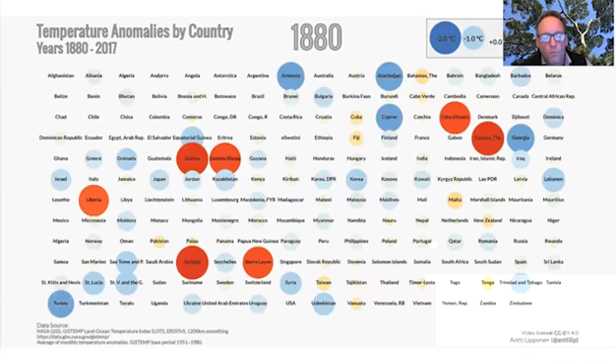So to start with, again, reminders of what are these signs of climate change that are all around us, some of which are subtle and some of which are more obvious. And I think the more important thing is what are the tangible impacts, some of which we have seen but some of which we have yet to see, on the way we live our lives, our health, and our overall well-being. So I just wanted to show you this diagram, which I find kind of interesting and compelling at the same time.

The first time you won't get it, but you see it goes from bluer to redder, showing from 1880 to 2017 the trend towards a warming of temperatures across the globe. I think that's one that people have commonly heard of.

In addition, along with this temperature, it's all interrelated, such that what is expected to happen with the effects of climate change, because of warming temperatures and the change in the way the atmosphere is able to absorb water, there'll be an increase in precipitation intensity. A larger portion of the rainfall will occur in shorter periods of time. We've seen that in other areas where we may have longer periods of drought, but then when we have rainfall, it's much more intense than we're historically used to.

You'll note here on this chart, where it's blue is areas where the climate models predict an increase in intensity by the end of the 21st century. We happen to be in one of those pretty darker blue areas, and the brown tends to be where there's going to be increased drought.

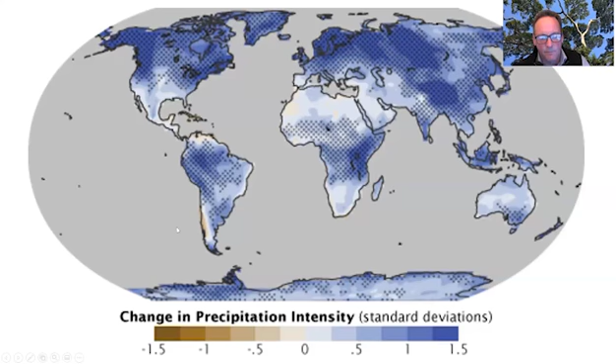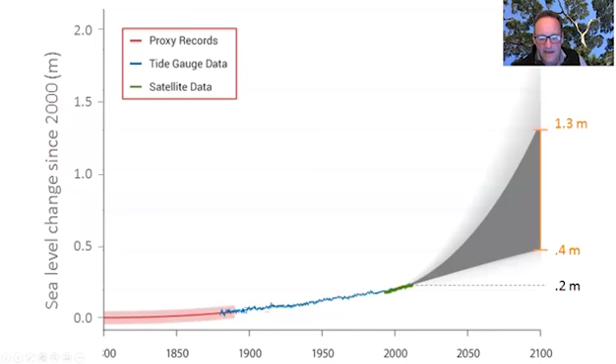One that is more common, given that we live closer to the coast, is the concept of sea level rise. You see there's a variety of data proving this out, from historic records and tide gauges more in current times from the 1900s up to the present, and now satellite data is also proving that out.

In the Boston area, the general projections, although they're often in flux, everybody's kind of agreed at this point that by 2030, which is now not even 10 years away, we'll have 9 inches of sea level rise. Another 40 years down the road in 2070, we'll have another 18 inches, for 27 inches of sea level rise. And by the end of the century, there's anticipated being 40 plus inches of sea level rise change. So how do we start to think about that, and how do we deal with that?

Another topic that doesn't get discussed as much is CO2 emissions and discharge. It's interesting to see that we are amongst the nations of China, Russia, Germany, and Japan that are highest in output of CO2 emissions, again changing the atmosphere around us. And those that are highest impacted are those that are not producing it, but are those countries such as Central Africa, Asia, and the South Pacific.

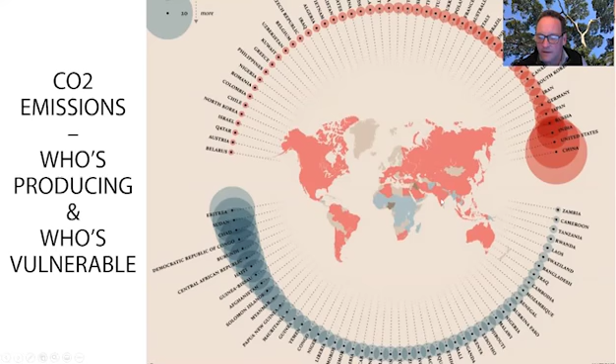How do we walk before we run and take measures in that regard? So we're going to look a little bit at some climate change mitigation trends over time, and then turning into strategies, and then related resources.

Being in Boston, I'm fortunate to be involved with an organization called Urban Land Institute. About 5 to 7 years ago, as soon as sea level rise started becoming an issue with superstorm Sandy and other storms we've seen along the East Coast, which hasn't been as severe in Boston but have in other areas, it brought attention to these issues. Urban Land Institute, composed of a lot of real estate related professionals, put together with ULI funding a study about living with water.

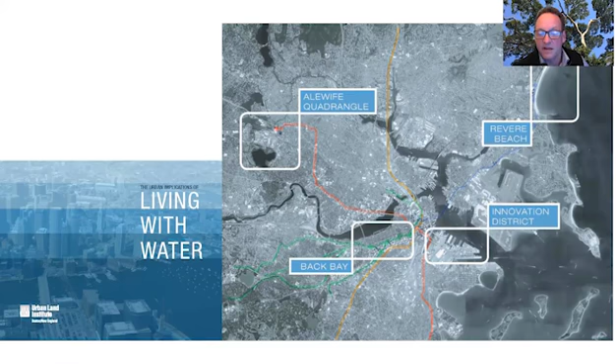It started to think about this not being a possibility, but an inevitability. While it was a bit visionary in its thinking, it got us to think about how do we live and how do we accommodate some of these inevitable climate changes. While this is a bit extreme in its notion, if we look down the road...

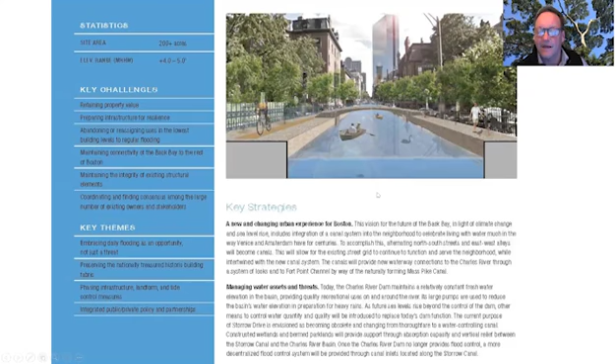...this is a picture of Back Bay, I think Berkeley Street was the idea, as we have climate change. The interesting thing about climate change is that the areas we have filled through time are the places the sea is most strident in taking back. That's partially because those areas of fill haven't been filled that much, but those are the areas most vulnerable to sea level rise. So the idea of Back Bay being a modern day Venice is something that may be on the long distance horizon.

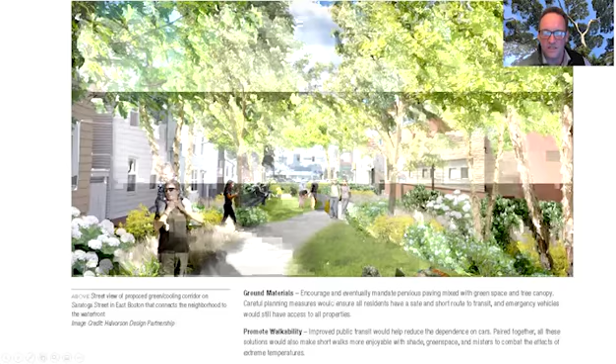So what are the visionary counter effects we have to that? That report looked at a variety of different neighborhoods around Boston, and in East Boston, looked at the idea that maybe as we move through time, we think about our transportation and maybe the need for less roads. If we think about transforming some of our roads selectively into public open space, they can be cooling environments, places of enhanced quality of life and better habitat to counteract the heat island effect. These were early on kind of inspirational studies that were done.

More recently, that has all initiated a mayor-initiated study called Climate Ready Boston that looks at the overall city of Boston, not just the water's edges, but where the city overall is impacted by climate change. The city has gone from an overall study to a series of different neighborhood studies, one by one, to look at the measures needed in those areas to both protect and use those protections as a means of enhancing those communities.

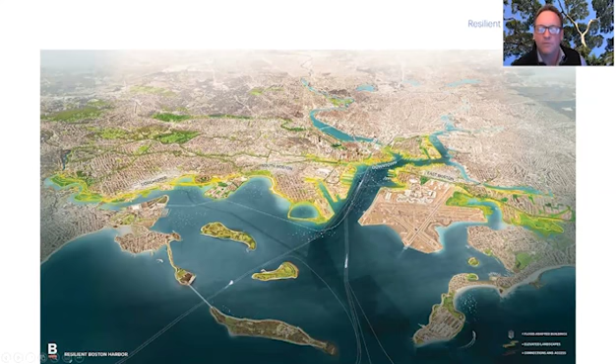We've been fortunate to work on this area in the center, the South Boston neighborhood, and I'm going to zoom into that now. As part of that study, the South Boston neighborhood is composed of a lot of varied neighborhoods and areas. The original historic neighborhood is the residential neighborhood you see more in gray and white in the middle, and that just so happens to be on the highest area of land.

The other areas of land within the dotted line are mostly the areas that we as humans have filled, which was formerly sea. Those are the areas, as I mentioned earlier, most vulnerable to sea level rise and storm surge. This map identifies, first with black lines with arrows, where the points along the shoreline are right now, today, most vulnerable to flood pathways when we have king high tides, in association with storm surges.

The darkest blue areas are where they're experiencing flooding conditions right now, in and around South Boston. As the areas get lighter, that becomes the next projection—the next lightest area is around 2030, and the even lighter area is 2070.

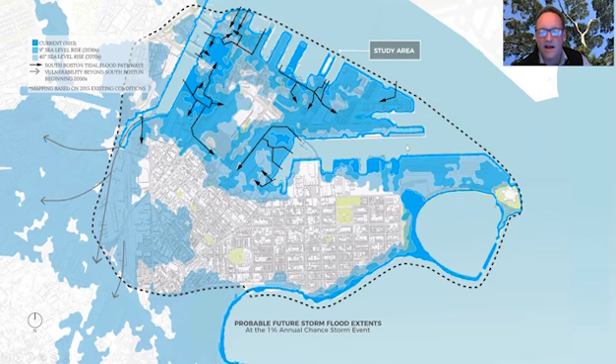One of the interesting ironies: this goes from South Boston, Castle Island, to Massport's Conley Terminal, where much of the shipping containers come in and out. This is the maritime area, and then the more recently developed Seaport—ironically, a lot of this development was permitted prior to the last recession, so it occurred before the awareness of sea level rise and climate change had come to pass. Now, retroactively, these property owners are having to think about how to protect their properties and enhance them.

This is Fort Point Channel, adjacent to South Station, and its vulnerability connects to the Massachusetts Turnpike, which is a low spot such that if Fort Point Channel overtops, it has the ability to flood all of Back Bay, as the Mass Pike is a lowered section where the water could make its way easily down towards Allston-Brighton.

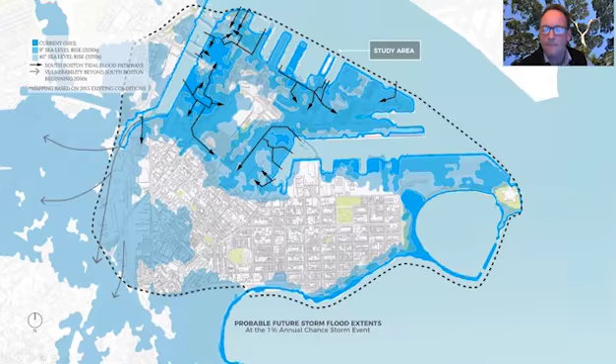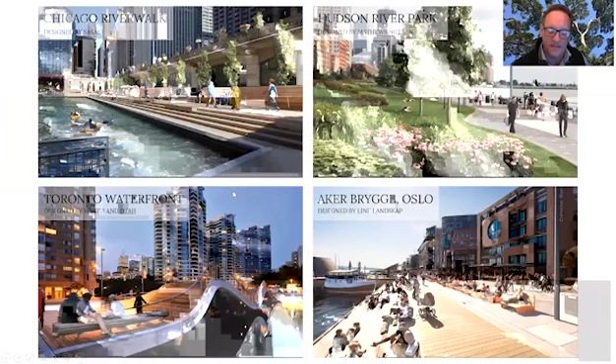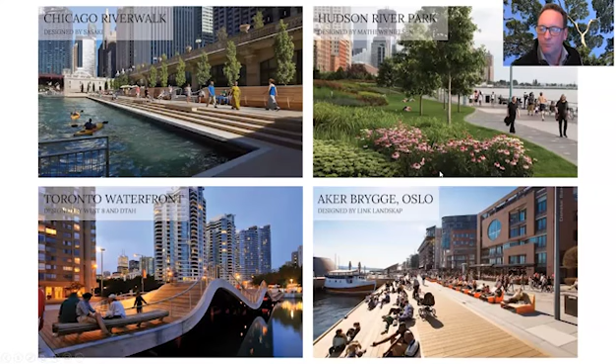These slides—whether it be Chicago Riverwalk, Hudson River Park, which is more of a green solution, Oslo, or Toronto waterfront—they all combine investments in infrastructure with improvements in quality of life and enhancements, in some cases, to the environment. As we think about these available solutions, they span a range of approaches, with sub-approaches within that, but I'll touch on this lightly tonight given the time frame.

The most straightforward approach to creating protection in infrastructure is essentially a vertical seawall that protects us, keeping the water out and the inland side in. The next strategy would be to not focus on keeping water out from the land's edge, but instead on waterproofing our buildings and structures so water cannot penetrate inboard. Those are two structural solutions.

Now let's look at two more green infrastructure solutions. The next one is what's called a raised harbor walk or park space, in which the existing land edge is here, the water is outboard of it, and we create a raised levee and landform to keep the water out, while also hopefully providing more than just that—public amenity, a place for people to gather, maybe a route along the water's edge, so it's a place of transit as well. This one respects the water's edge.

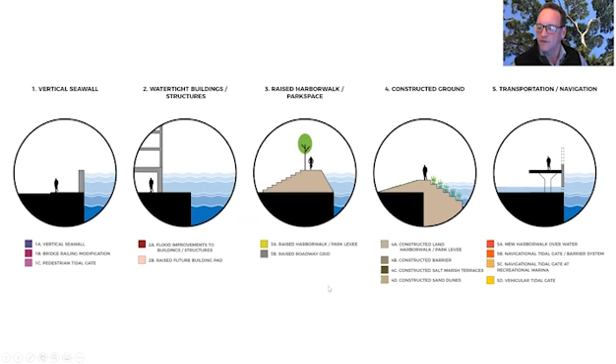One thing we're faced with in modern times, which hasn't been perceived as permittable until now, is the idea of constructed ground—since in some instances we're restricted in how much we can do inland, there's the possibility of doing more land filling into the water to help with protection and also create additional green infrastructure. The last one is raising our transportation and navigation up out of the water so that it's protected. I'll show you quickly what these solutions look like.

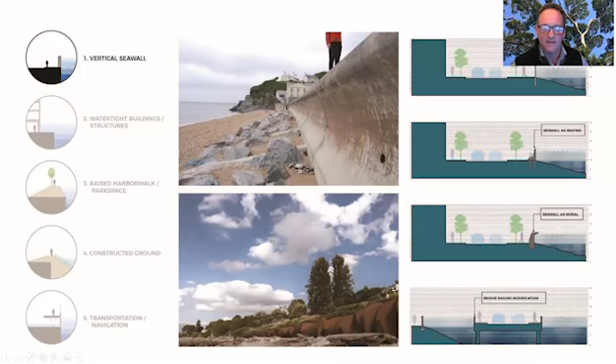A vertical seawall, like Joppa Park, is typically a pretty straightforward concrete structure. That could also take a more artful form, as you see at the bottom—still a protective structure, but using a Corten steel element, which is more attractive.

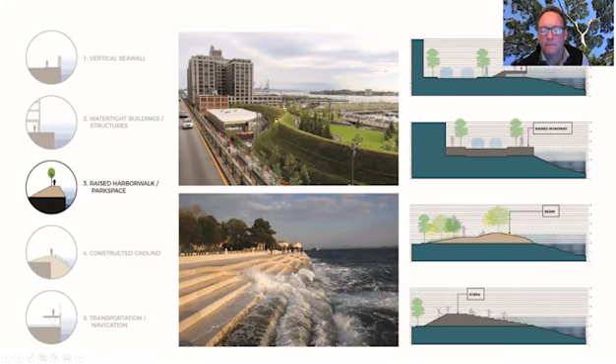Protection of buildings essentially involves envelopes, windows and doors that have sealants and are designed to protect against floodwaters, along with potentially deployable doors that provide additional protection. On the land side, thinking again of these raised solutions that protect—some can be more hardscape, like you see at the bottom, or more of a green, infiltrating nature, contributing to the ecology and environment, as shown in the upper right-hand side.

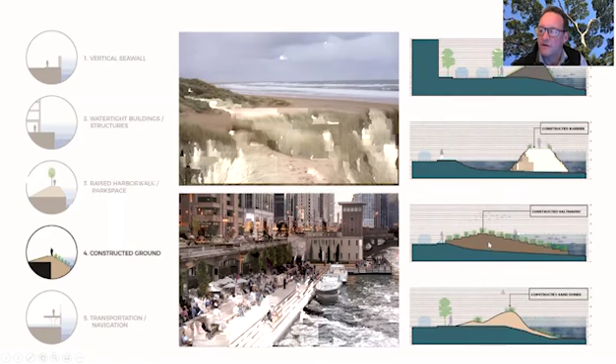Then there are land-filling forms, shown in the vignettes on the right-hand side, which can take the form of constructed dunes, a constructed barrier, a salt marsh built out into the water's edge, or a constructed harbor walk. So what you're seeing is there's a toolkit that one can use.

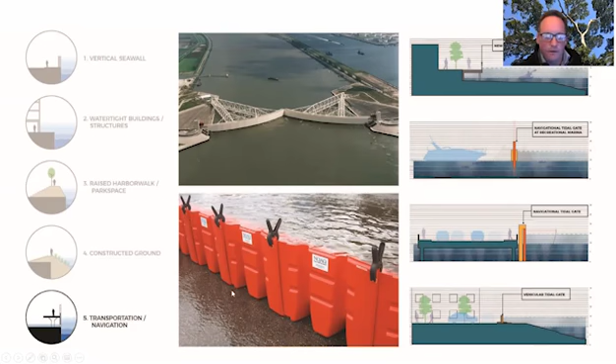And then as we think about navigational areas that are protected, you may be familiar with tide gates that have been created here in the Netherlands, also a similar one being created outside of Venice, and then deployable structures that protect temporarily against climate change and sea level rise.

I think the one point I want to make is that what we've learned, and what we're learning, is that it's not one size fits all. As we look around sites, there's a lot of variability, so you end up incorporating a variety of different solutions to create an overall barrier.

And the other thing is that a lot of solutions have been coming about site by site, but what we're learning is that it's important that we achieve regional solutions that protect an entire area. That requires a lot of planning and coordination, because with a site-by-site solution, essentially your weakest link is the place where you have vulnerability.

So I'm going to zoom in a little on the South Boston study we did. There's a series of different strategies that we assessed and worked with the city on. Strategy A is what protects the most, right at the water's edge, and we assessed the cost of that type of strategy.

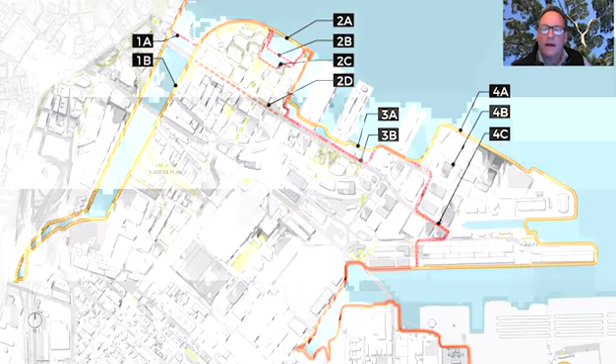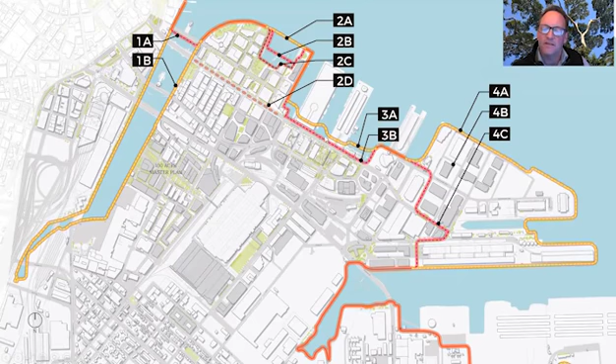That strategy protects some things and then allows other things outboard of it to be more vulnerable. There's a yellow strategy that's more expensive, but protects essentially everything because it encompasses all along the edge.

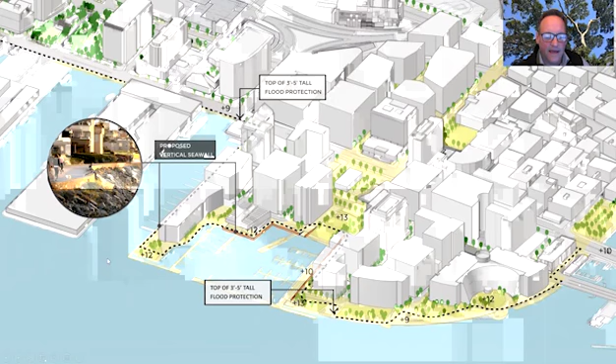So then zooming into this area right adjacent to Fan Pier, showing you a couple of those and how they could be implemented—again, there's not one solution, but a variety of options to be considered. Along the existing edge of Fan Pier, the idea of introducing a vertical seawall.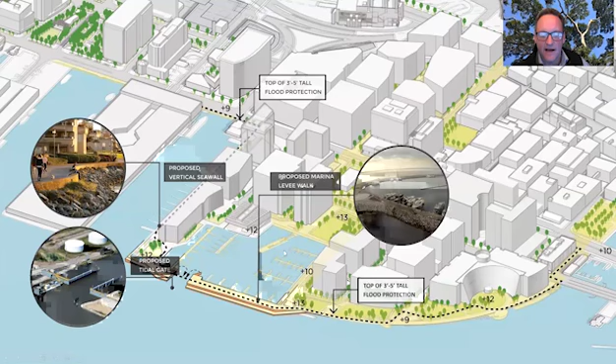Or taking a more green infrastructure approach where you capture some of what was marina and create a larger open space that can be floodable and can contain some of the water as well, with modifications to the marina. Or a solution that protects the entire area, where you bring the barrier around the outside and protect everything inboard of the marina and such.

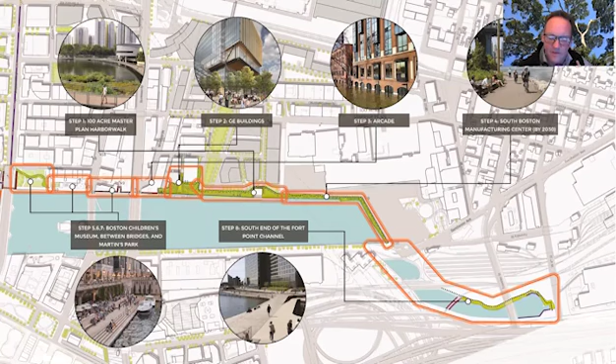So again, showing you along Fort Point Channel, a similar kind of thing. It creates this toolkit of solutions and shows how you tie that toolkit together to create a continual regional strategy. Now I'm going to zoom in a little closer to give you a real idea of what it feels like on the ground.

This is a study we looked at near the Children's Museum, if you know where that is, along Fort Point Channel. That's the building to the right, Fort Point Channel on the left. This shows the existing grade on the left of the Harbor Walk, which is continuous along the harbor's edge—the average monthly tide here at elevation 4, Harbor Walk at elevation 10, and then the predicted sea level rise of 9 inches at 12, and 40 inches.

So the city is really looking to get to a point where we're protecting probably 12 inches above the 40-inch barrier. So we looked at a variety of different solutions, one of which is this.

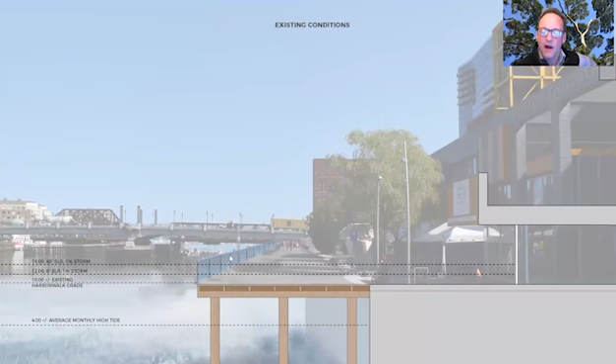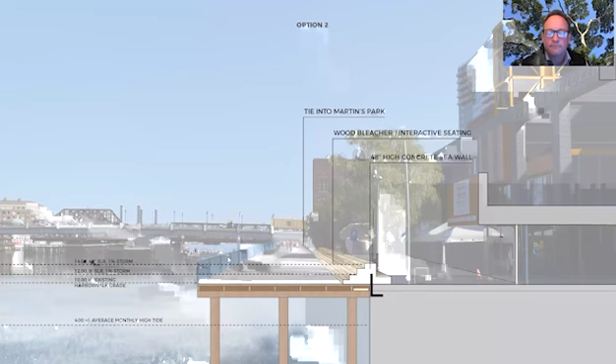This next solution, option 2, takes a different approach: the Harbor Walk is going to continue to be floodable, but we introduce an element here that's kind of a wall, but also something that people can take advantage of on most normal days.

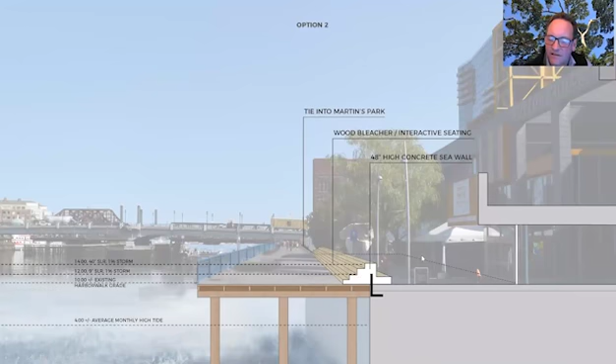It can be served as a bleacher where people can hang out adjacent to the Children's Museum and gather and socialize, and yet provides that additional protection. Again, multiple benefits of infrastructure investment.

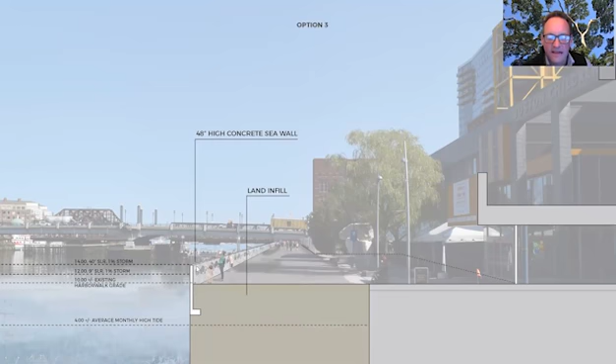Or we could take a more holistic approach, put the barrier at the outside. This shows a more green or gray infrastructure where it's simply a wall protecting everything inland, including the Harbor Walk. And then a more ambitious approach, which is this land building where it's moving into the Fort Point Channel, creating a living shoreline there, and having it also as a public amenity and additional habitat along the Fort Point Channel edge.

So we're going to go from these larger planning studies to a couple of projects that we've worked on that take existing sites and improve their resiliency and their environmental benefits.

The first site we're going to look at is down along the Neponset River, almost to Quincy, Dorchester being here, JFK Library and so forth up in this area, right adjacent to the Neponset River. This site had different uses through time, but is most known for being a significant paper plant in which there was a lot of contamination that occurred on the site.

DCR became owner of this property, which is Department of Conservation and Recreation for the state of Massachusetts. They wanted to make it into a public amenity adjacent to the community, and they were also interested in seeing how we could create a more resilient, naturalized living shoreline along the edge of the Neponset River.

So going back, this being the living shoreline that we're going to be talking about, I just wanted to do a little primer on living shorelines.

Living shorelines are great sources, and we have them all throughout the Great Marsh here, but they're great sources of storing carbon. They trap sediment. They provide great opportunity for habitat and biodiversity as well as recreation.

Living shorelines in the form of marshes and oyster reefs are actually great absorbers of wave energy during normal times and also during storm events, and they're more resilient than gray infrastructure. But our tendency has been through time to harden our shorelines more. In fact, it's anticipated that 33% of our shorelines in the US will be hardened by 2100.

So looking at green infrastructure instead, this is the existing edge of that Schaefer paper site. On the uphill side was some Phragmites, some invasive species here, and a degraded and eroded shoreline.

So we were able to come in working with a local environmental consultant, Mike DeRosa from Ipswich, and we were able to regrade, remove the invasives mechanically, replant with Spartina here, and then after a period of about 2 years, get this living shoreline to establish.

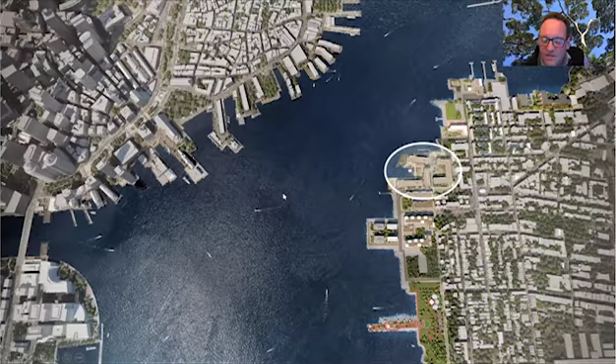This is the East Boston harbor edge, directly across from, you'll probably know more readily, Marriott Long Wharf, the aquarium, and Christopher Columbus Park. This is the site in its prior condition.

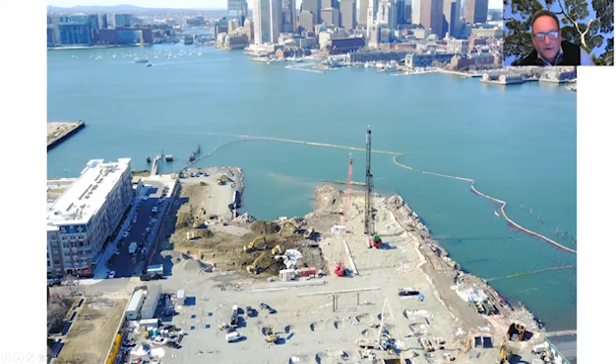It too had, like many of our waterfronts, just like Newburyport's waterfront, a lot of industrial uses that resulted in those prior uses either going away or being abandoned, leaving degraded environmental contamination. This site happened to be particularly blessed with asbestos contamination.

So the cost of that, as well as real estate values up until the past decade, made development in East Boston not as practical. But given the current increase in real estate in East Boston, this site became practical for redevelopment. So this redevelopment was facing both the environmental issues, subgrade, as well as being adjacent to the harbor with sea level rise and climate change issues facing it.

So one of the things that the City of Boston is now looking at is the idea that new development has to plan for sea level rise. In fact, it has to design for, for commercial applications, 40 inches of sea level rise, plus what they call 12 inches of freeboard, which is in addition to that 40 inches, to establish the floor level of commercial structures.

That is increased to 24 inches over the 12 inches for residential structures. So when this project was being developed, given the environmental conditions, it was also beneficial to raise up the finished floor elevations of the site so as not to get down into the contaminants. So there's a parking garage underneath it.

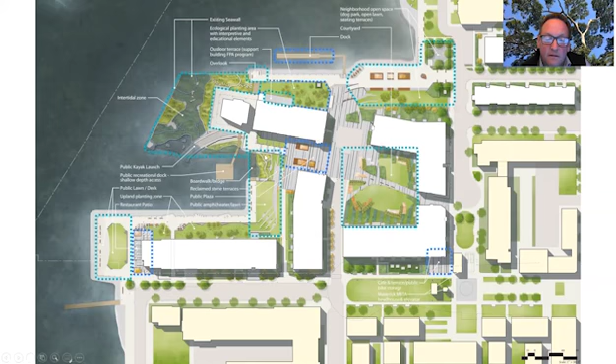One of the benefits of building along the harbor is the commitment to Chapter 91, which requires public access all along the site. You'll notice as I show you some of this, there are terrific public access improvements that the developer is committed to within this whole site, both along its perimeter as well as in the center of the site.

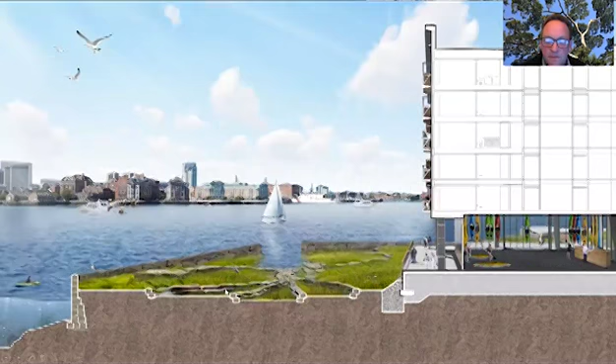Now I'm going to focus out in this area, out beyond the edge of the development. One of the fun parts about the development is that the developer wanted to challenge ourselves to make this a really distinct project. This project had a decaying seawall out at the edge of the perimeter sticking into the harbor. Instead of taking on the development rights and developing the project the whole way out closer to the water's edge, we talked about creating a living shoreline.

Instead of filling, we actually excavated out this area and created a hole in part of the seawall to encourage the seawater to come in, and as the public is able to get close, we wanted to highlight for them firsthand, twice a day, the drama of tidal change.

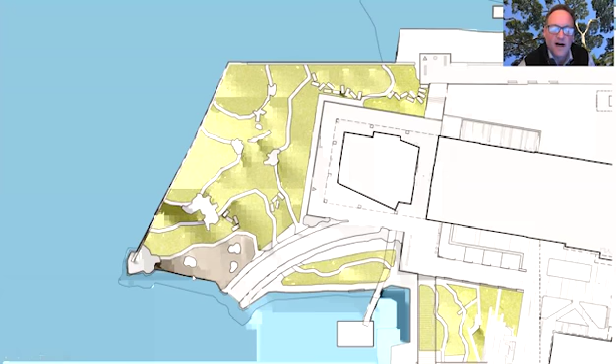I'm going to show you a little cartoon: this is the site, this is the building projection, and this is the public walkway that goes around. This is at low tide, and there's a progression of the water infiltrating from the sides as it gets to mid tide and then progresses up to high tide, so that at high tide, when you're on this public walkway, you feel like you're in the middle of the harbor.

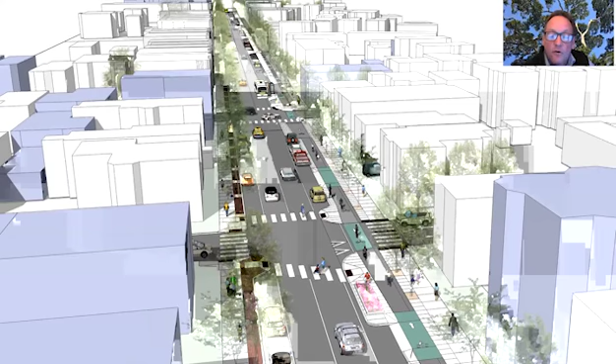So this street is called Western Avenue. It has a companion street, River Street. Western Avenue goes, as its name implies, west towards the Harvard Allston campus from Central Square. On the next parallel street over is River Street. This project is completed, and we're now working on River Street in a similar vein.

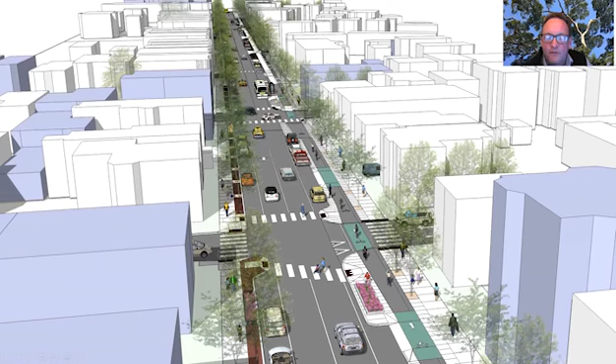What you'll see is, on the right-hand side, this project has been driven by an infrastructure replacement project. So while that infrastructure is being replaced, we've been able to move it out into what was the edge of a travel lane and create a widened streetscape on the one side.

That has involved rebuilding infrastructure below grade, with the above-grade benefit being this: on the far side, you get an enhanced treeway, tree zone, and public amenity zone along the street edge, sidewalk along the back edge, and a more enhanced opposite side of the street where you've widened it to accommodate bus shelters and green infrastructure plantings right along the street edge, in association with where you eliminate parking.

All of this is buffered, and then you get a very highly defined off-road bike zone, a cycle track, separate and distinct from the pedestrian circulation. We place street trees in between, all over top of a sand-based structural soil, so the trees can take advantage of a continuous bed of planting soil underneath. The cycle track itself is pervious asphalt.

In addition, at certain points in the street we were able to take advantage of continuous planting beds along the edge, breaking the curb to allow stormwater to come in and infiltrate, with sediment and nutrients dispersed before the overflow heads into the public storm drain. So, a couple of projects in Cambridge there.

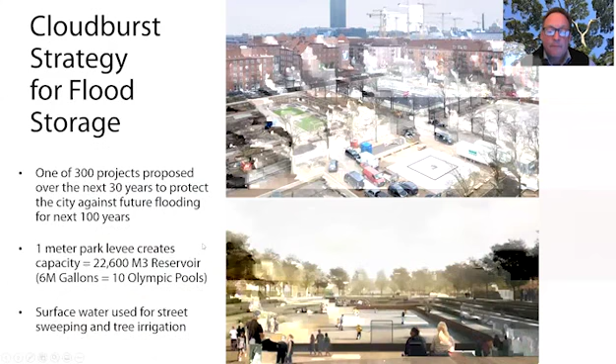This is a project called Enghave Park, a classic little park in which they've rebuilt each of these to have substantial infrastructure and water support capacity below grade, where you don't see it, and in some places where you do see it.

One of the projects, this particular park, is built as a 1-meter-down park that can be a public amenity most days. But during strong storm events, instead of stormwater going to storm drains and heading out to the river or flooding local areas, given the capacity of storm drains, the stormwater is instead fed to these particular locations, both above grade and below grade. Just this one area is able to accommodate the equivalent of 10 Olympic swimming pools, and that water is then slowly released into the environment, rather than rapidly released.

It can also be used for street sweeping and for tree irrigation.

Another pretty bold move is in Bangkok, where the city has developed much more densely over time, and given its density and amount of impervious surface, has had a lot of environmental degradation, water runoff, and erosion issues.

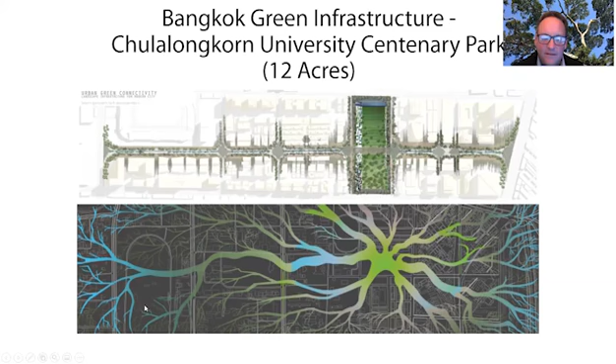So they've taken a measure akin to the Central Park vision, except Central Park existed before the city did, whereas in this instance it's kind of a retroactive Central Park, creating a 12-acre Central Park in the center of Bangkok, where stormwater is captured along the main boulevard, re-envisioned as a greenway, and redirected, much like the vision of a tree and its roots, to this Central Park.

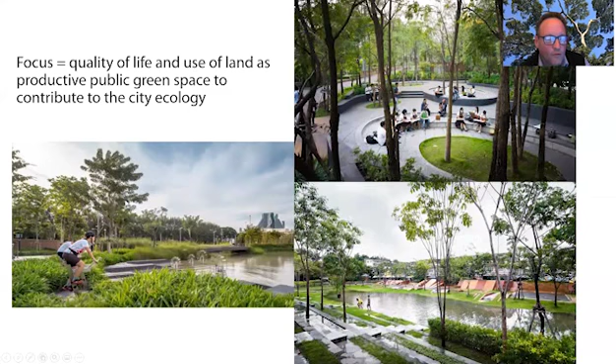That Central Park becomes a destination, where there was a lack of green space in the city, there is now green space, and it's productive green space for enhancing quality of life and contributing to the ecology of the city.

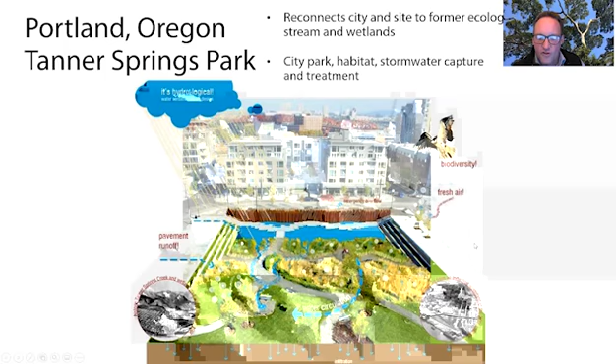And then more locally, looking at Portland, Oregon, I happen to be very fond of this project, in which the site was excavated and filled to harken back to its former ecological basis as Tanner Springs in Portland, around which there was development. This site is both beautiful and functional, with environmental and ecological benefits, providing habitat.

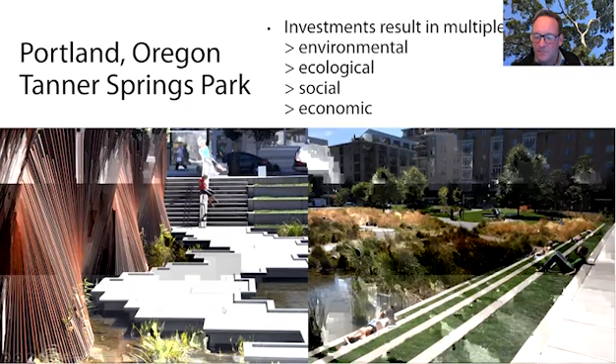Stormwater from adjacent sites is brought here where it can be pre-treated and captured instead of overtaxing the municipality. Who's to say green infrastructure can't be artful? The reuse of railroad ties as an art form within the site provides many benefits, and this site becomes such a destination that it has terrific economic impact on the area around it.

Now coming back to where we live and opportunities here, thinking even modestly, I want to go back to when Ellie Baker and I, who's a local woman who works for Horsley Witten Group, presented this idea to the city. It's hard to believe that it's already 10 years ago.

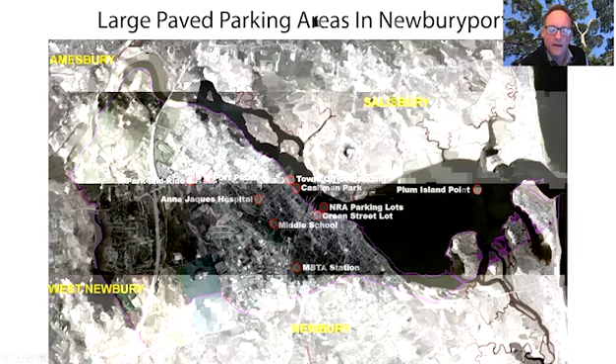We looked at the amount of large paved areas that we have in Newburyport—you know, any number of them. Here you see highlighted the Park and Ride, Port Plaza, Anna Jaques Hospital, etc. There's a lot of paved parking lots and a lot of runoff, a lot of impervious surface, heat islands. And what do they typically look like? They typically look like this.

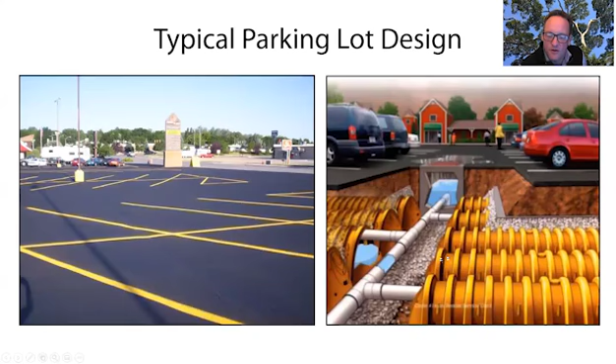And how do we deal with stormwater? We often look at putting in subsurface, highly expensive, structured systems below grade to hold that water so it doesn't run off. We're talking about, as we look through time, and as the reliance on personal vehicles potentially decreases and we hopefully head towards more public transportation, there are opportunities.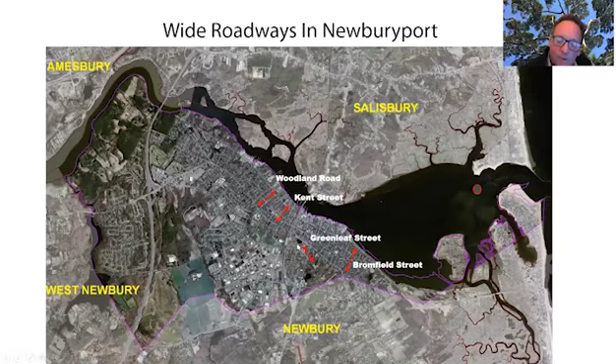Also within Newburyport, we're challenged by the fact that we've got High Street, which is high, and Merrimack Street, which is low, and we have a lot of wide roadways—be it Kent Street, Broad Street, King Street, State Street, etc., on down to Federal Street to the south end. A lot of the challenges we face, especially if you ask business owners downtown, is that a lot of that water during these storms with high levels of precipitation results in runoff and flooding downhill, all as the water heads from High Street towards the river.

If we think boldly about projects again harkening to Portland, we can analogize public streets to what we've just talked about, and the ability to introduce green infrastructure where you can see the curbs along the edge of the roadway allow stormwater to penetrate. Some of that stormwater is then captured, filtered, and held before it's released, and can serve as amenities for the landscape as well. If we think about that along some of our existing streets, it's easy to picture those without much interruption to what exists there now.

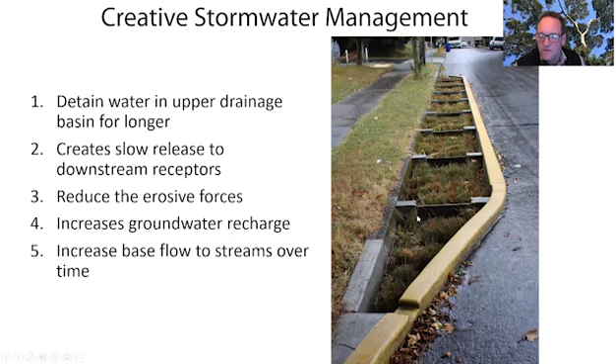So what are the benefits of stormwater management? Again, they detain water for a longer time period versus running off. They reduce the amount of erosion. There's opportunity for groundwater recharge. In a lot of our urban areas, we've depleted our groundwater, so this allows us to add back to our groundwater and increase base flows underground to streams.

In addition, these kinds of solutions can be beautiful—they don't have to just be functional. They serve to capture sediment as runoff and capture organic contaminants, and if you look at them against the cost of subsurface infrastructure, the costs are less significant. It just requires a commitment to maintenance, which is a different mode from which we've been used to thinking.

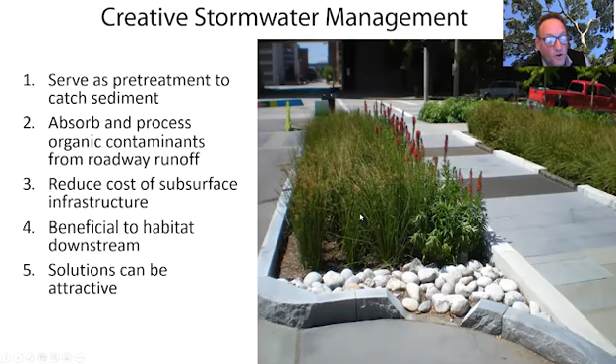So if we look at opportunities, if you think about Greenleaf Street, along where the CVS is, with expansive amounts of asphalt—couldn't there be opportunities to introduce elements like this that allow for stormwater runoff and green infrastructure to take place?

Also, along Kent Street and the broader streets, where we've got double-sided parking, in some places we're selectively introducing green infrastructure, replacing parking to reduce the amount of stormwater running downhill towards Merrimack Street and the river.

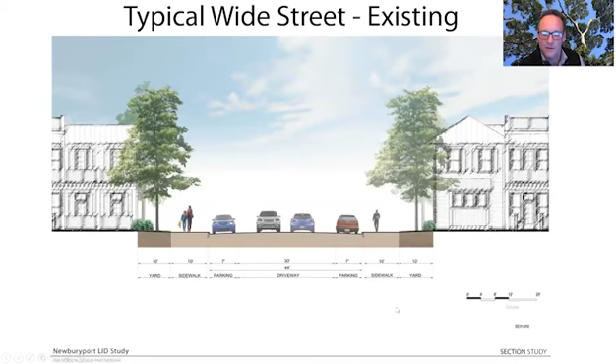So what does that look like in cross-section? Here's our existing conditions where we've got two-way travel, parking on both sides, and an extra generous roadway width. We can still accommodate all that and have stormwater treatment inboard of it.

So just to end with a few thoughts, if any of this is compelling to you and you found it interesting, here's what's going on right now and who the thought leaders are. The Trust for Public Land, if you look them up on the web, has an interesting strategy of connect, cool, absorb, and protect.

Connect is about focusing on human connection through multimodal connections, bike and pedestrian. Cooling is about investments in our urban forests. Absorbing is thinking about the kinds of surfaces we've got so we reduce runoff, and protection is, as we've discussed, strategies for sea level rise and extreme climate protection.

And how are they doing that? If you look on their website, Trust for Public Land, they're doing a lot of GIS planning with a variety of different cities throughout the country, including Boston, and what they call the Metro Mayors Coalition, which includes a lot of the cities closer to Boston.

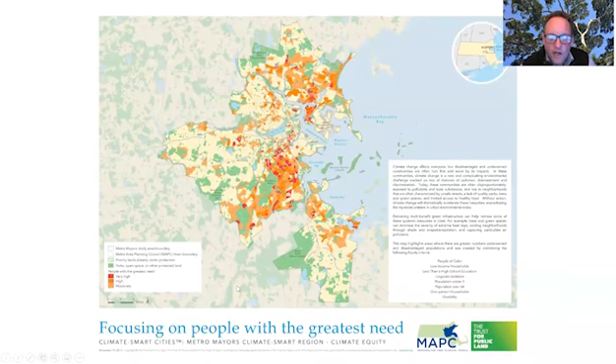Some of their outputs are these layered GIS plans that are very useful for focusing on where we put our capital investments to get the greatest impact.

This is a layer that shows, in red, the areas with the greatest need based on assessing a variety of vulnerabilities.

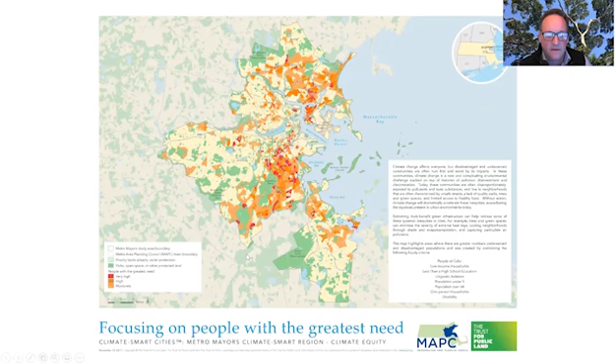Some of those layers include assessing where the heat islands are most extreme, and where there are structures we may not often think about, whether it be electrical substations, sewage treatment plants, or other critical services like hospitals, police stations, or fire stations that may be vulnerable to climate change, and protecting those.

So all those layers combine to assist us in assessing where investments are most needed.

Another organization I want to highlight, since I said earlier that it's important to think about how we develop solutions that connect all the dots without leaving gaps, is the Mystic River Watershed Association, which is thinking about climate resiliency on a watershed scale, trying to get the 13 communities that make up that watershed to think about solutions that don't just stop at town borders, but cross over them.

They're a very interesting group to follow, as I think they're trying to set up a prototype that can be repeated throughout the state in terms of setting up governance across the watershed level.

In terms of funding, this program started as a small effort, but the governor and the environmental secretary have started to get behind it, such that cities can become — and I think Newburyport is already an MVP city — eligible to get funding.

They can have municipal vulnerability plans prepared, and based upon the vulnerabilities identified in those plans, submit grants to address those issues as related to the priorities. This program is starting to ramp up in terms of the funding available to it.

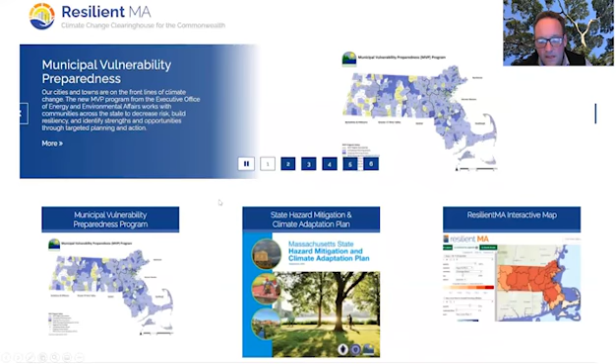But the continued challenge for the state and for all municipalities is the governance, and how they both raise the capital for levying fees to pay for this, as well as for the infrastructure and long-term maintenance.

So if that's not enough for you all, I hope that was of interest. If you have any questions, I'm happy to chat more about it.